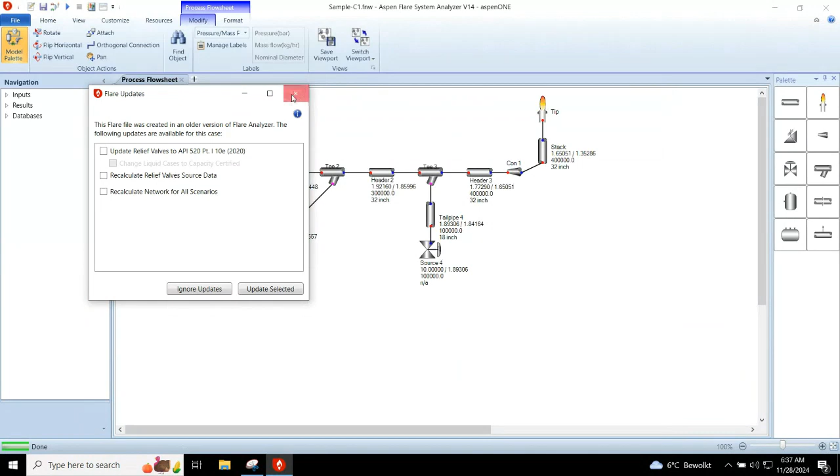So typically a flare header starts with the source, and in Flare System Analyzer there are two categories of source. One is the PSV, right? One symbol is the control valve. So it can be really a control valve, it can be a blowdown valve, right? So these are the two types of source in the Flare System Analyzer.

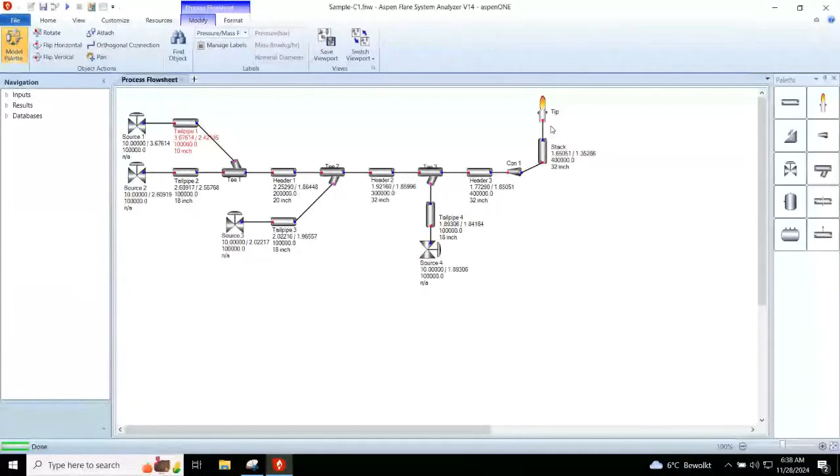So we model the source, which is basically the conditions of relief, how much is the flow rate. Then we model all the pipe downstream of the source, all the way till the releasing point, right? The releasing point typically is the flare tip, where it could be flare, it could be vent, right? It doesn't matter because we're calculating the hydraulics, right?

So why don't we use maybe other tools like HYSYS pipe segment, etc.? I think one is the criteria. First, I would say it's a network, right? There's a lot of pipe joining together to the headers, and you can actually have multiple tips, right? So it can be a complex network, right?

So the one I show you is a simple network, which is what we call a convergent network, because it's converging into a single flare tip, right? If you have two flare tips, then you can say it's kind of divergent, right? There are also headers which have interconnecting piping, which create loops, etc., right?

And basically when we do it, it's not like typical piping, right, where we do the calculation forward, right?

We calculate. Okay, so the sample example is in the installation. So I don't really use any customized file, right, Hassan? Then sorry, I was, yeah.

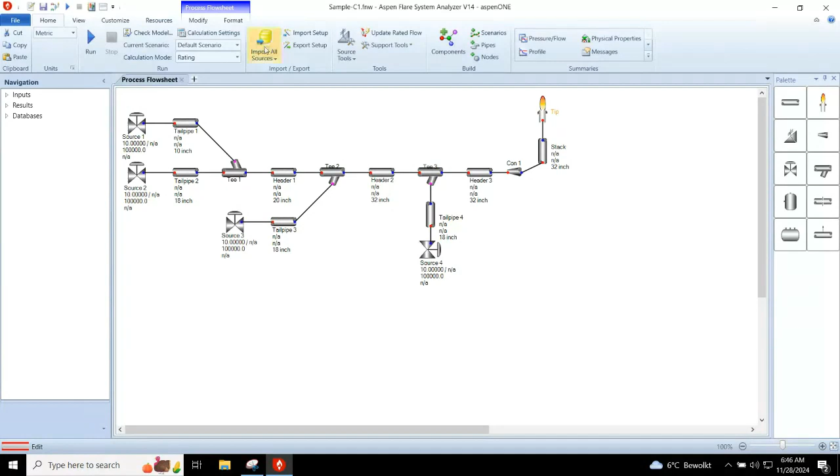The third mode is called debottlenecking. You have a flare network and you might install a new system, a new skid, etc. So you have maybe two or three relief devices forming a subheader and joining the main header. Of course, you only want to size the new system which is added, for example, maybe this part.

So we can identify that using debottlenecking, and we can say this pipe is to be sized, but the rest cannot be changed. So it's a mix between rating and design. So that's the brief on all three calculation modes. So let me go into design.

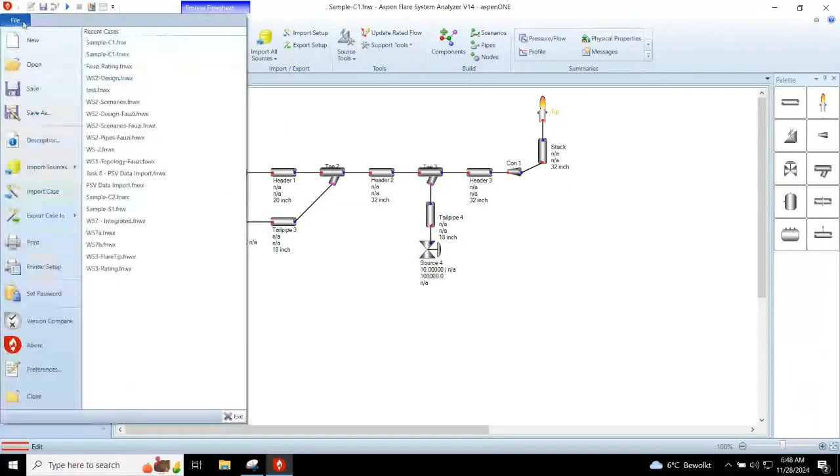I will just quickly close this and start with an empty file. This is just a label, you can just click OK. You see the first thing it will ask is what is the composition. Let's say I'm just going to put this and click OK, and it gives you an empty sheet.

The first thing we typically do is put the sources. The sources could be a PSV or a blowdown valve. Then we start putting the pipes, how they join, starting from the tailpipe. There is a term, especially for PSVs: tailpipe. The tailpipe is the pipe immediately after the relief device, before joining a subheader or a header.

So why do we differentiate between tailpipe and non-tailpipe? Because a tailpipe is dedicated to only one relief device. The term is typically used for PSVs. No other relief device is meant to join there. When you read the standard or a company design guideline, the tailpipe is allowed less conservative criteria. For example, people may allow 0.7 or 0.8 Mach number for a tailpipe.

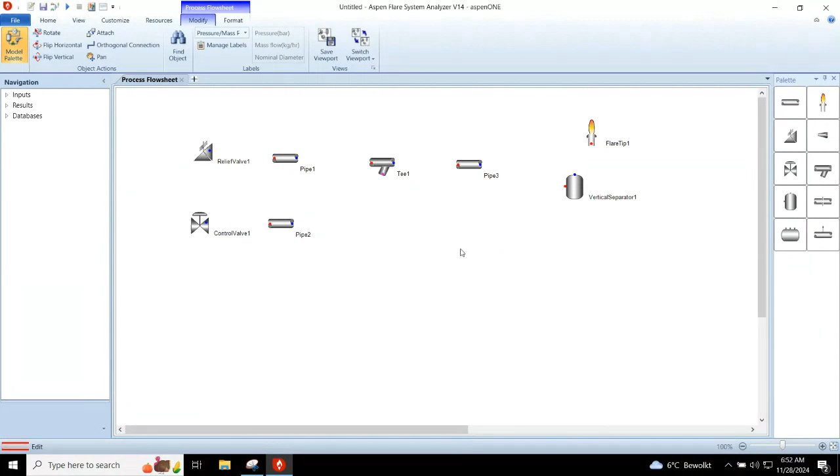Yeah, Omar, I plan to cover that at the end. Sorry, yeah. I'm feeling really under the weather, but yeah, you guys give me energy, right?

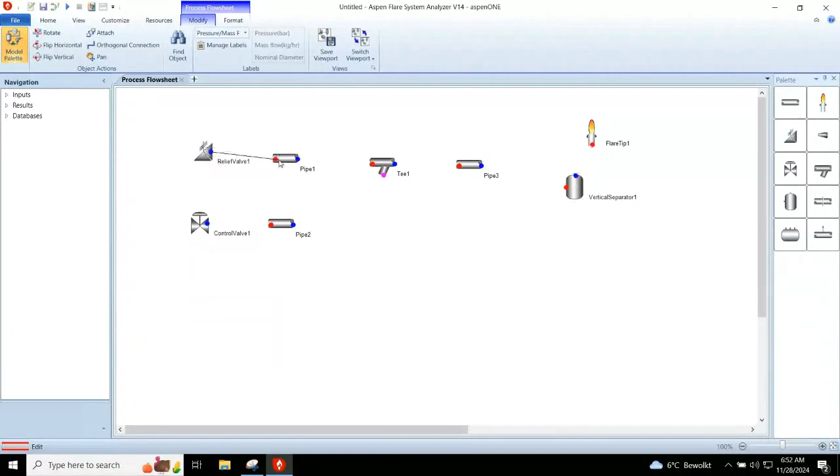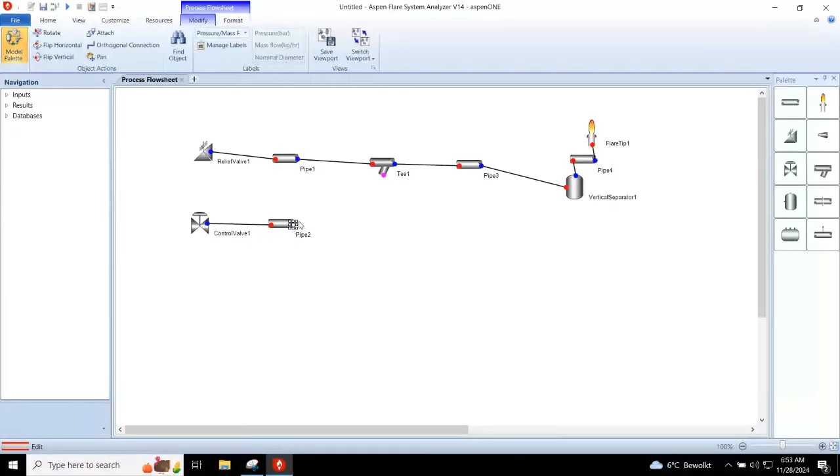All right. So typically, how I build, I hold down the control, then I just connect this, right? Right. Let me build this. All right. So this network, this is just a diagram, right? So what's missing, especially for the pipe, right? The pipe, of course, like I said, here you have to tell which one is a tailpipe. So this one, yes, right.

Oh yeah, the other thing, tailpipe has different criteria, right? I think different limit of the criteria. The other thing also in API, typically they ask tailpipe needs to be sized for rated flow rate, right? It's not design flow rate. So PSV calculated load, let's say 1,000, but you have to size the tailpipe based on the rated flow rate. Like let's say for a selected orifice, the rated flow rate could be, let's say 1,200, right? So that's why it's important to identify which one is a tailpipe, which one is not.

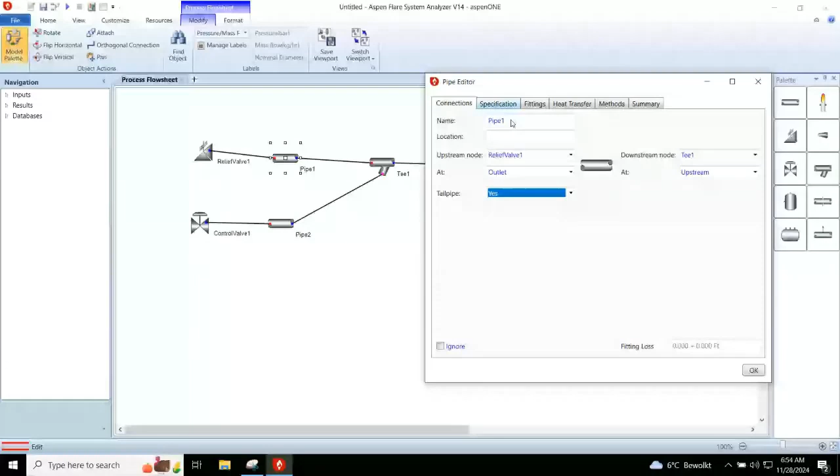Right. So you can see the connection. This pipe is tailpipe, right? Then under the specification, right? So you can see here the most important specification, of course, like the length and the elevation change, right? So I'm starting with a design case, right? So it is also where you are in the engineering phase, right? Sometimes in the beginning, as greenfield project or whatever, right?

You don't have the detailed configurations of isometric where you can get exactly how many bends, how many lengths, etc. What are the valves involved, right? So probably you don't have the complete P&ID, etc. Layout has not been built, pipe has not been routed, but you need to do this preliminary sizing, right? So typically in that case, you might still put a straight length, right? So maybe you draw based on the layout, you say, oh, this equipment is where my main header is, and maybe this pipe is, let's say 50 meter, right? Remember, this is a straight length, right?

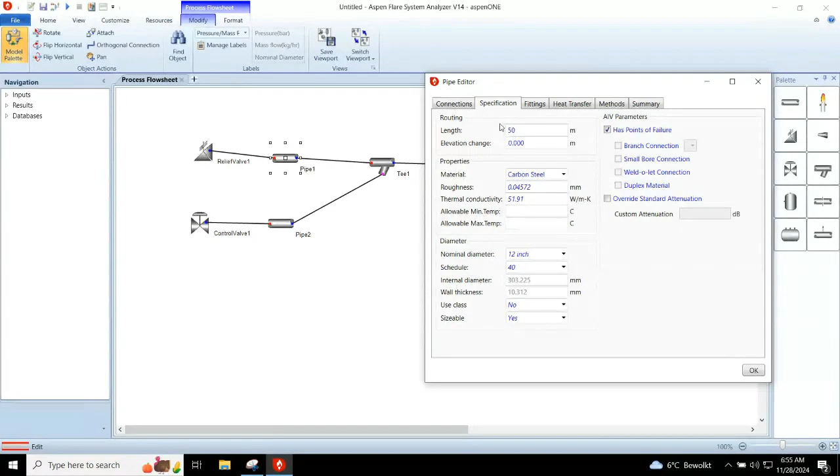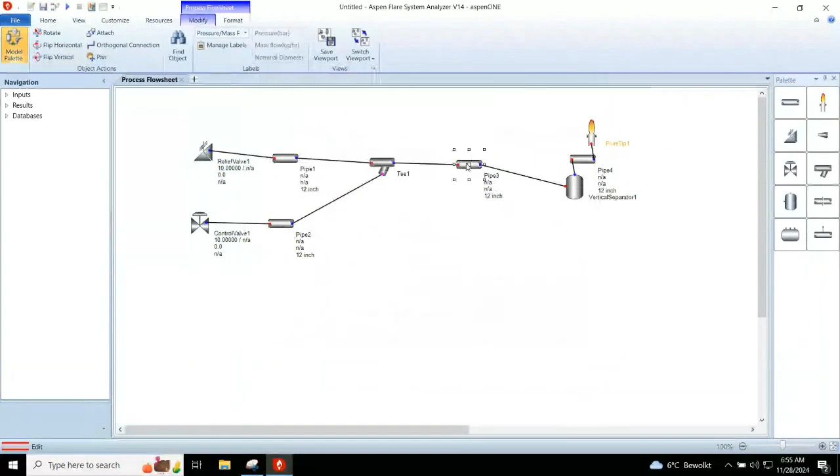OK, so the important part is the length, right? So for pipe, let me fill that. So I'm just going to put some length also here. Let's say this is 30 meter, right? Then this is, let's say, well, my computer is a bit slow. Let's say this is another 50 meter, right? Then this is, let's say, 100 meter. All right. Okay, so the pipe is defined, right?

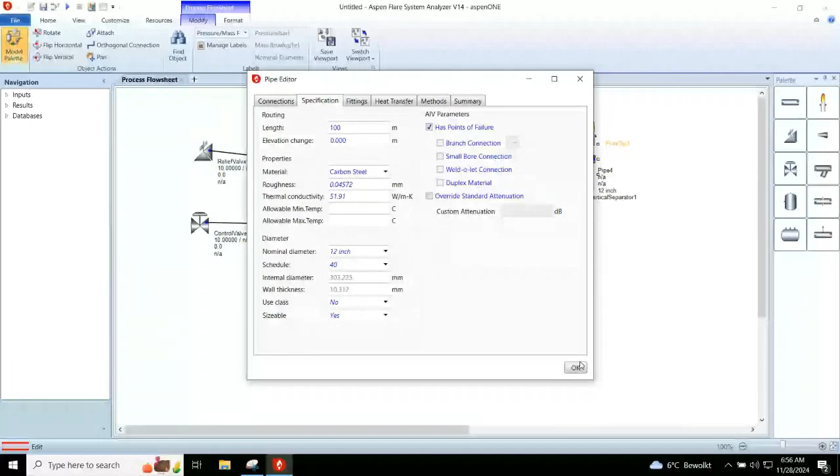So now we have to define other components, right? Before I define other components, I'll go to the source, right? So let's say this is the source, whatever here should come from either your blowdown calculations or PSV sizing, right? So it will ask you what is the relieving. Okay, what is the set pressure? Let's say this is set pressure, putting some numbers here, 15 bar, right? Relieving pressure. So this, you see, is the contingency.

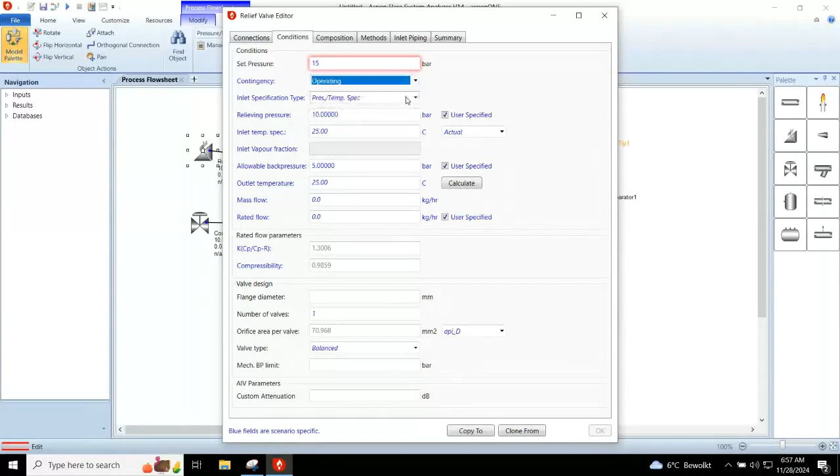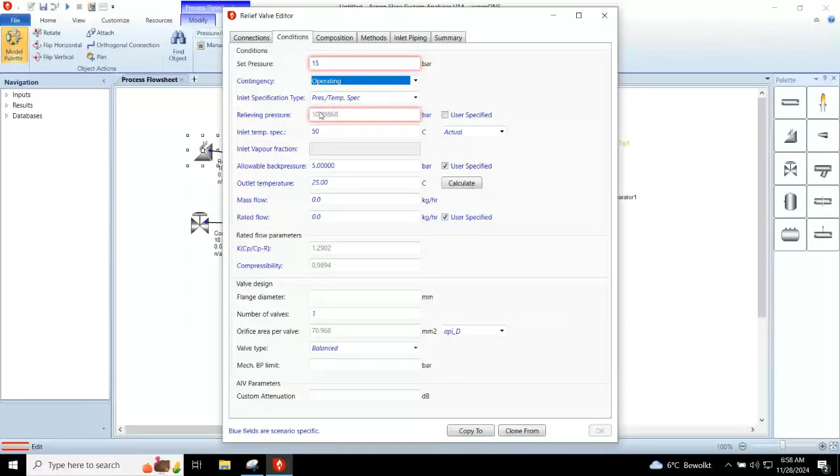So we have two, either operating or fire. That is the PSV size, right? So whether it's user specified or it's to be calculated, right? Relieving pressure. Okay, inlet temperature, let's say 50. Let me put this number first. I think there's something wrong, right? I will then override. There's something not right if I put, okay, 10, operating, which is 10% overpressure. This makes sense. Let me change it to 15. This should change. Funny, it doesn't change. Sometimes it does happen. Okay, let me just put it 10 first.

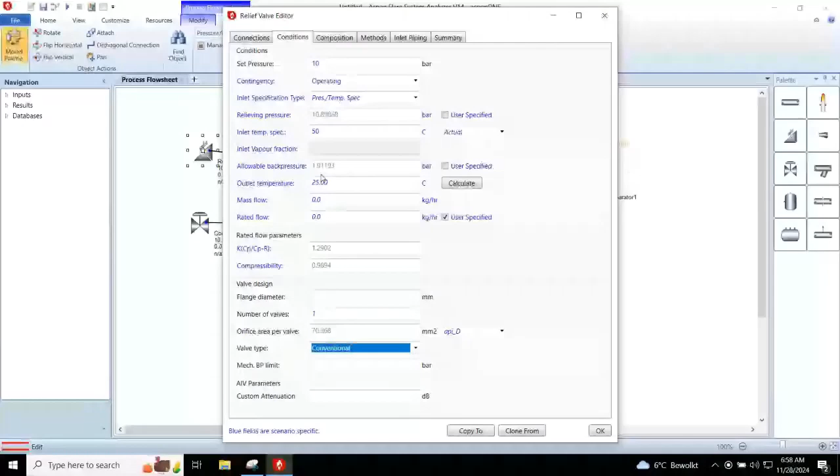Okay, inlet temperature, then allowable back pressure, right? Allowable back pressure will be based on the type of the valve, right? Let's say this is a pilot, right? So you can untick this, then it will, sorry, not pilot. I want to choose conventional actually. So this is about 10%, right? So it calculates. Outlet temperature, let's just put 25. Mass flow, let's put something, maybe 10,000, right?

So that's why this has a rated flow, right? The rated flow, typically we prorate it from the size of the orifice, the calculated orifice and the actual orifice, right? So let's say for this case, I need to put the composition first.

Give me 1 second. And again, during the initial design, probably you don't have a lot of details, or you don't want to put a lot of details. Maybe you just go by molecular weight. We can do composition, but depending. So let's just assume that in this case you have the molecular weight, 24. It will just distribute to the relevant components to get 24 molecular weight. But you can change it. If you have more information, you can put exactly the mole fraction or the mass fraction. Let me go back here.

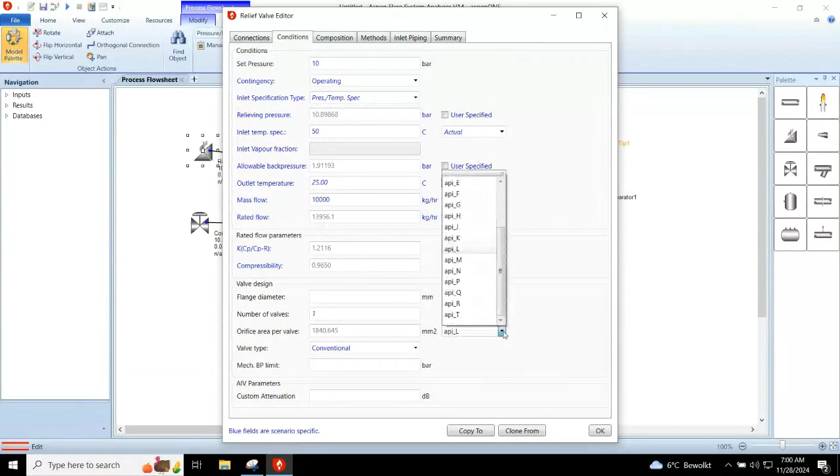So then I want the rated flow to be calculated, so I can untick this. You can see this rated flow is only 500. Our target is 10,000. That means this D orifice is not sufficient. So let's put L. It's getting there. It's actually already more than 13. Let me test it one more time. What about K? It cannot, right? It's below the required flow rate. So I think L seems to be right.

Okay. So I think this is done for this input. So let me click OK, and before I create anything, let me save this file. Where's my mouse? I can't see my mouse. Okay, here you go. Okay.

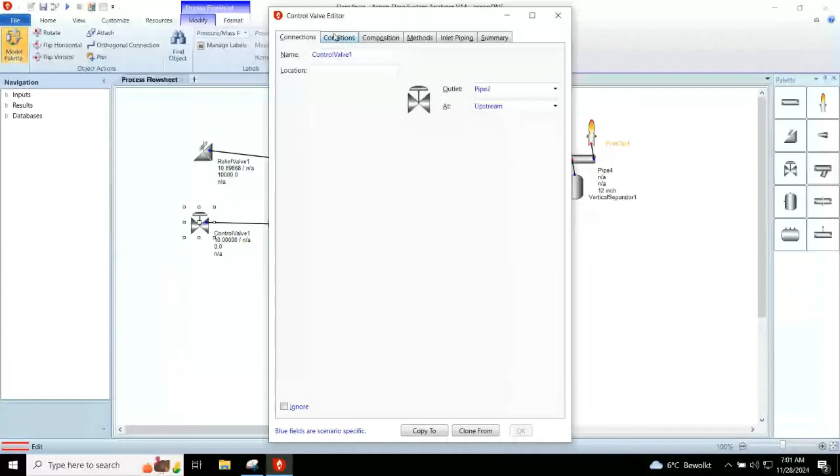So I've done the first relief valve, and this is the second source. It could be a control valve, it could be a blowdown valve. It is a simpler input typically. So let me just put here. 10 bar is okay. Let's say 25 is okay. I'm just going to put some. This is maybe 5,000. Composition, let's say 18. Okay.

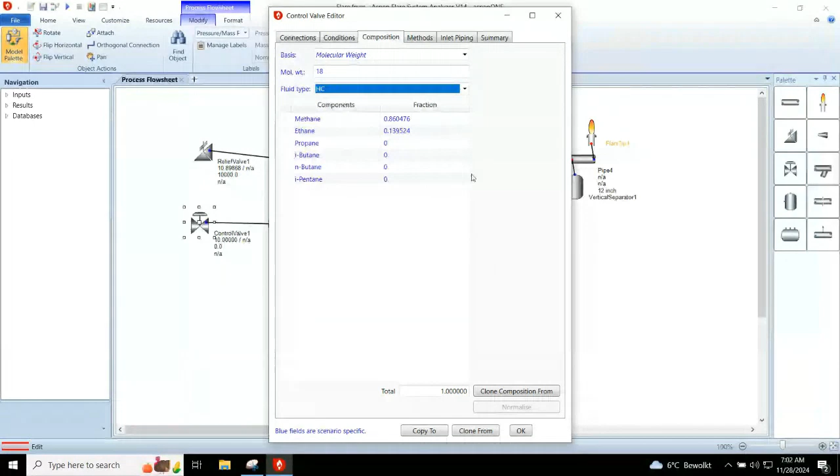And now I think the other thing is this. It has a default diameter. Let's just take that. So for this one I have put that, and I think the flare tip also typically has the input of the opening diameter. So let's put, I don't know, maybe 500. Yeah, fine. I'll just put 500 first. Okay. All right.

So you can see here we can change the calculation mode. The calculation mode can be rating. In this case, I want it to be design, because I have not changed the pipe input. You can see all the sizes are still the default size, 12 inch. And I want to size this, to determine whether this is the right size or not.

Then before that, we talked about the length. I've inputted the length, but in reality, there's no straight pipe. There are always fittings. We have not taken into account the valves, elbows, etc. So there's a concept of equivalent length. If we don't know, we still have to consider some additional length to cater for the elbows and the valves, etc. We don't want to be caught later when we add the details and the size is not sufficient.

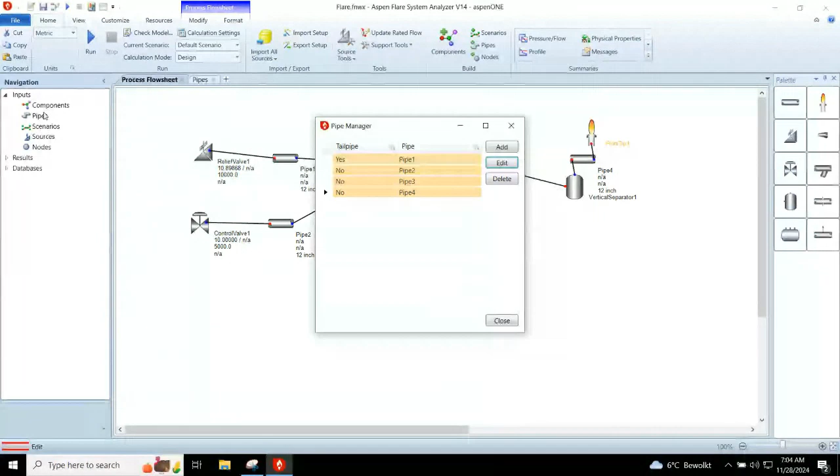So how do we do that? We can go to the pipe, and I will add this to all the pipes. I can select and click edit. In this case, we can go to the fittings. There is a length multiplier. This is something we can use to give some additional length by multiplying the straight length you have calculated. So let's say we put 20% more, 1.2. If I put it here, it will get applied to all the pipes. All right, I will check. You can see the length multiplier 1.2 is applied everywhere.

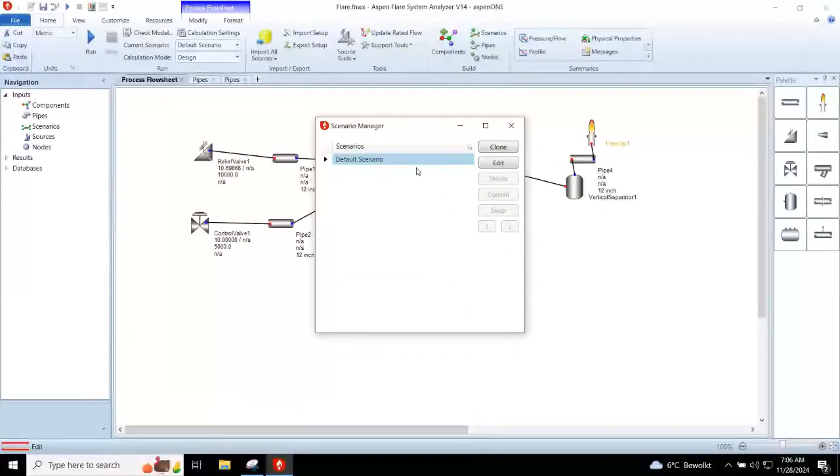So the next thing is, you can see here the default scenario. We need to define conditions or scenarios. Typically, a flare network is used for multiple release scenarios. It could be a fire case, or a failure of cooling water. You want to check what happens if this occurs. You might assume that in this fire zone, all the PSVs are relieving, so you will need to make sure all these sources are active. You define that under the scenario. You can have multiple scenarios; you can clone and edit. A scenario has two parts. One, it determines which source is active. So let's click edit.

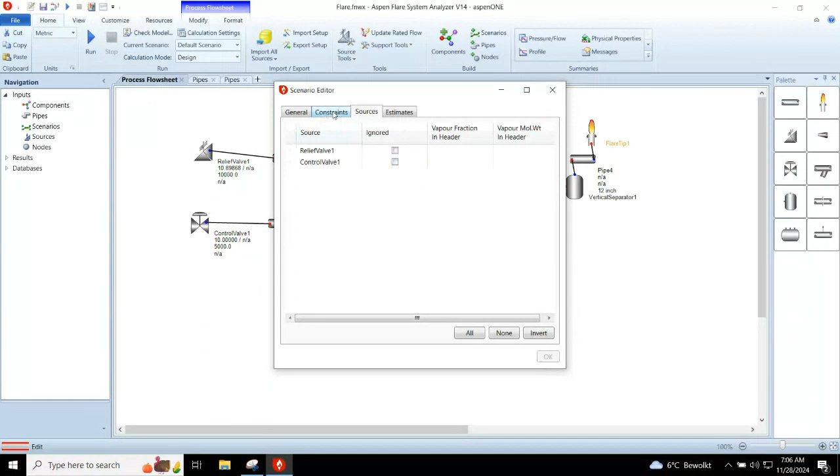So you can see here which source is active, right? If you tick, it's actually ignore. So that means in this scenario, because I don't tick, both sources are active, meaning they will release at the same time. And the other thing about scenario, you can apply a different criteria. So for example, here you can see the header, like I said, I put 0.5. I'm putting only one criteria now, I don't put other criteria. Tailpipe 0.7.

So I click OK. Then I think I have enough. So I will run the design case. So what it will do, it will iterate the changing the size. So it will give you warning because design will change the size.

Is it? Okay, there's something. Let me check what the result is. Oh, maybe the flow rate is too small. Everything becomes 2 inch. Okay, let me do. Is it true? Hold on. I think there's something. No, I don't think so. Let me check what's wrong.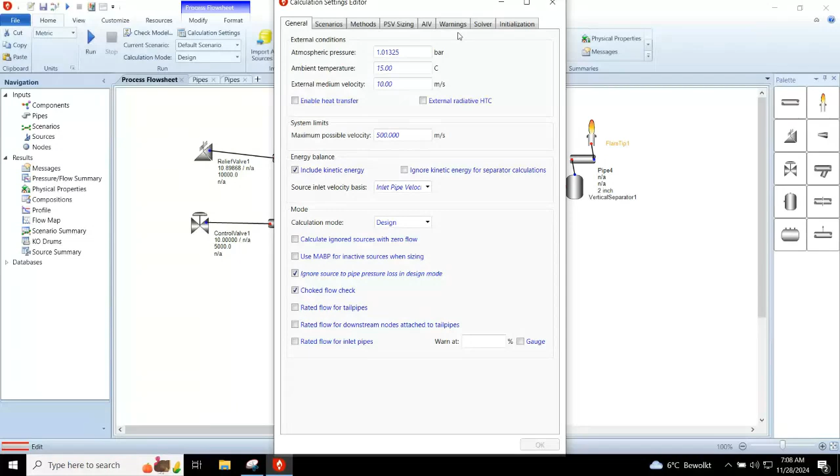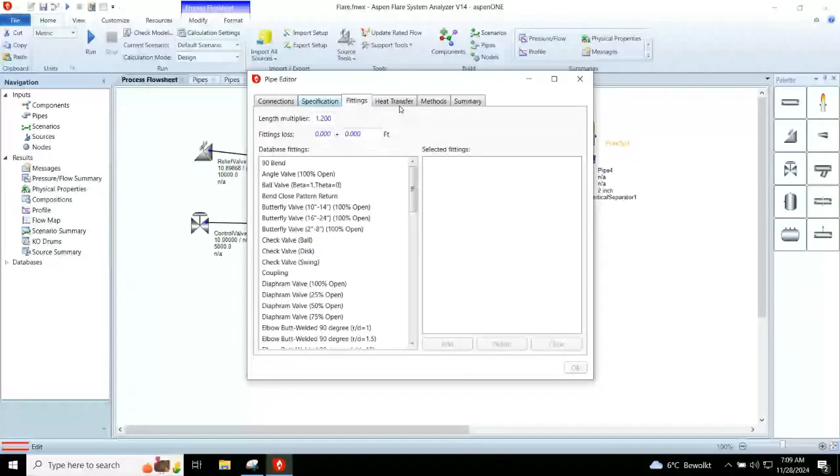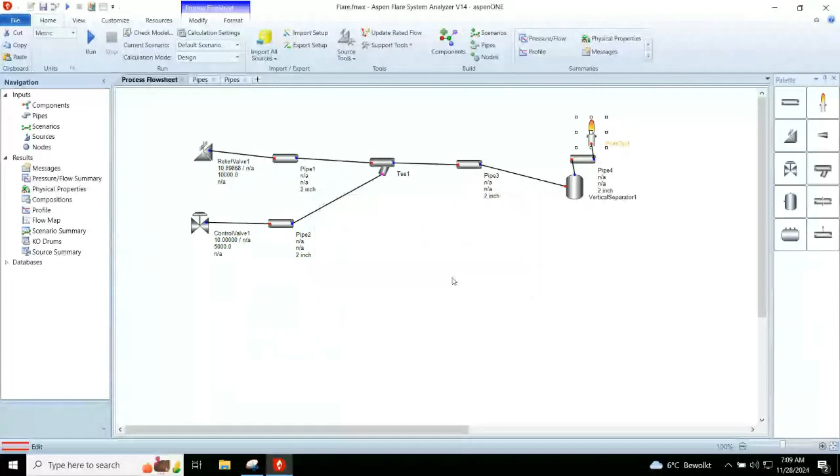Calculation setting. This is default scenario. Okay, calculate. I need to make sure it's calculating the scenario. Oh, still not calculating. Let me check, this is unusual. Nominal diameter. Or let me put this size first. It's not running. Give me 1 second.

Trace or error message. Calculation 36 error. Okay, let me check what the error is. Flash failure. I think it actually could be. Sorry, I didn't test the value, so I need to do some trial.

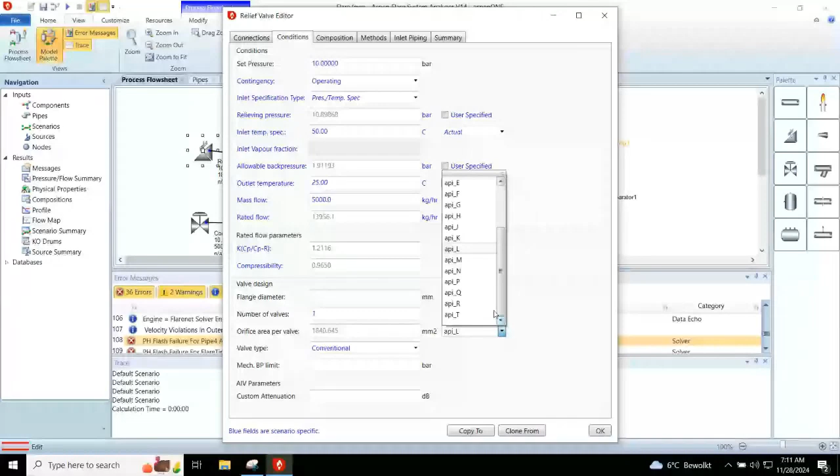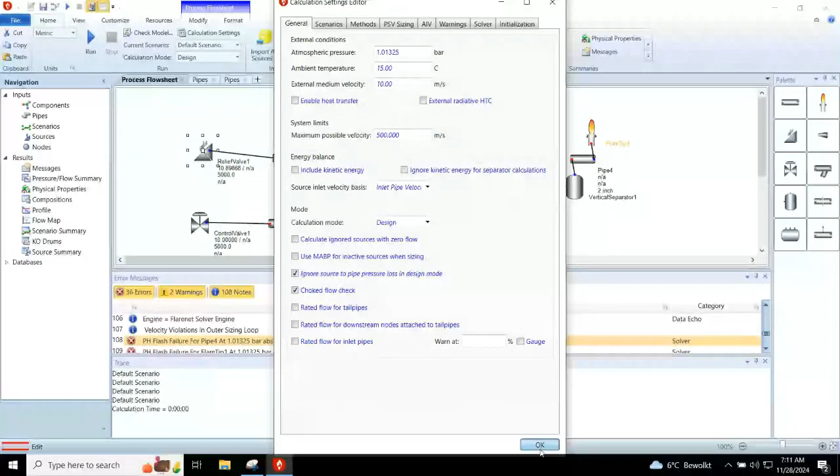Okay, sorry, Gerald. Yeah, let me do it. Oh yeah, thanks, Gerald. All right, okay, thank you so much.

All right, so you can see it's actually sizing. Of course, in this case, maybe we didn't limit the size. You can see here there's a 5-inch size, 3.5-inch size, 8-inch size. But the point is, it's actually iterating and changes the size of the pipe from the original 2-inch to meet the criteria.

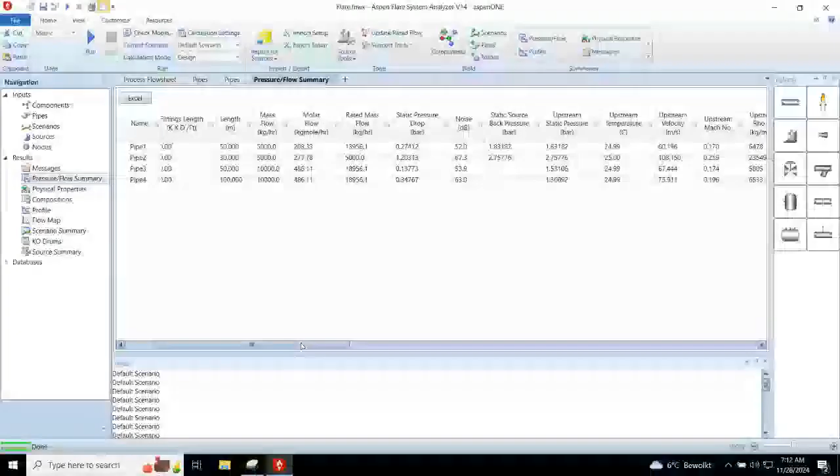Then we can take a look at the report here. For example, what is the noise? But again, this is still a crude calculation, because we haven't put a lot of details. We just put, let's say, a multiplier. We haven't considered heat transfer if you want to check temperatures of the pipes, etc. But this is enough to get you the preliminary sizing. So this is the design mode.

Okay, let me switch. So then typically we can also switch to rating mode. Once we have this preliminary, we can add more details. Or if this is an existing flare header, you can also start with rating. So let me switch to rating. First, I want to show you how rating operates.

So let's say this has been sized for this flow. I can either change the flow or I can change the pipe. Let's say the condition changes. This is your existing pipe, but maybe your equipment changes, you run a new relief load study and you're calculating the required relief. So I'm going to update the required relief and check whether my existing pipe size still holds. So let's say this becomes 7,500.

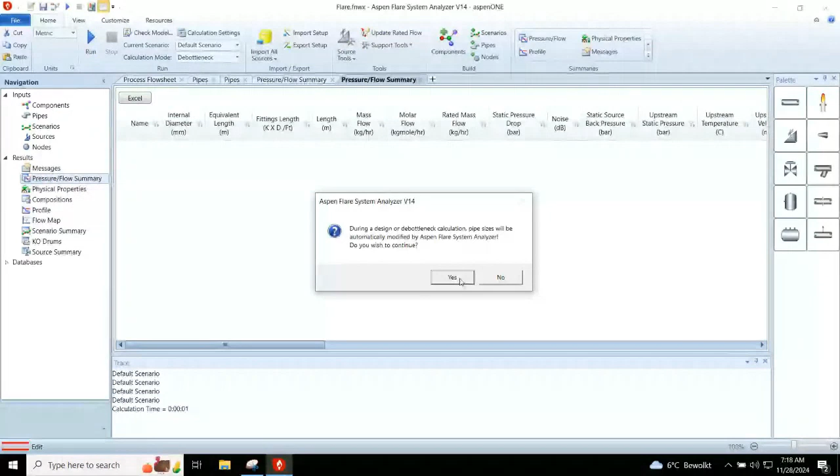Right. So let me check. Okay. So it seems like 6 inch is actually fine. You can see 6 inch is fine, right? Let me demonstrate by changing the pipe. So maybe I'll change to 4 inch. Oh, sorry.

So you can see, it was 6 inch and it changed to 8 inch. You see, this has become 8 inch. It was 6 inch when we first ran, right? So the debottleneck will look at which pipe is sizable, which I said is only this tailpipe. Then it changed this to 8 inch. So this is the calculation mode for debottleneck.

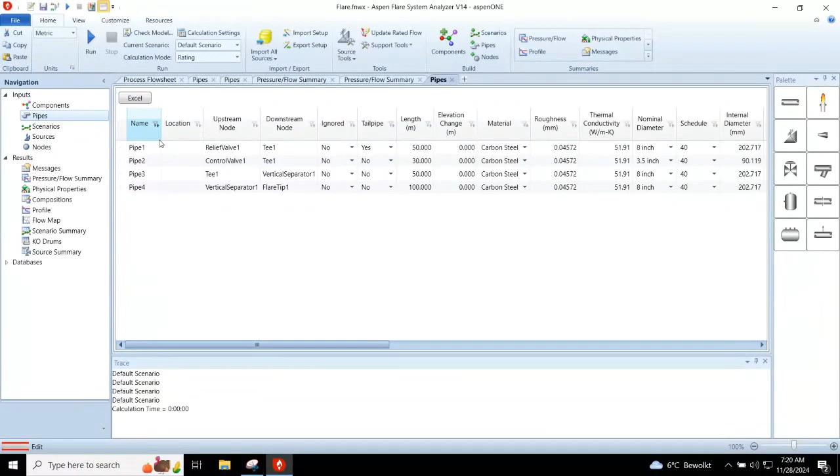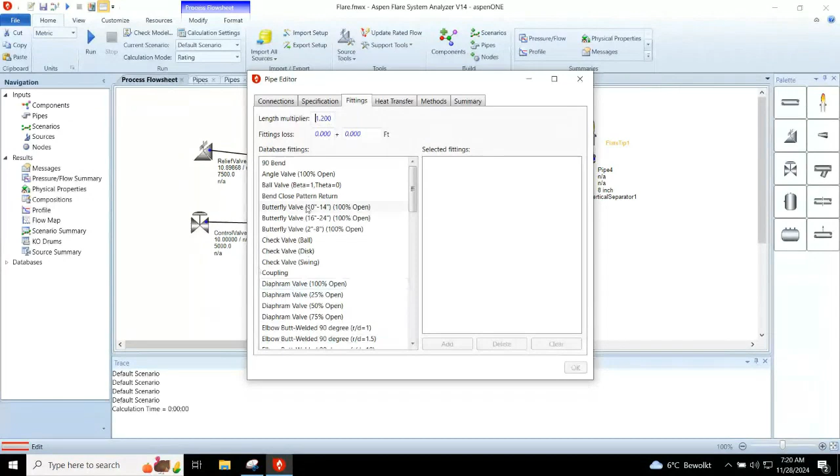Then I want to go back to rating mode. Rating mode, like I said, can be used after you get your preliminary size from the design mode. Then you switch to rating mode, and this is where you start putting details. Maybe the details are that you change the equivalent length. Last time we put equivalent length 1.2, and if you already know the configuration, you can change this to 1 and put exactly what the fittings are.

Then you may be enabling the heat transfer calculation, right? Because during the design, you don't want a lot of heavy calculation, because it's doing iteration calculations on the pipe. So once it got the first guess of the size, we can switch to rating, add more details, add more calculations, then verify whether the size still stands, right?

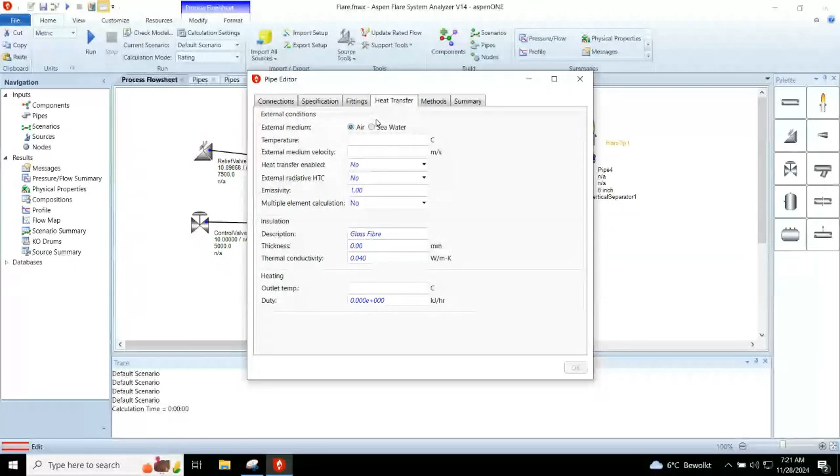For example, the heat transfer, updating the fittings, and you might update the flare tip, depending on what information you have. You might add the curve from the flare tip. The curve is typically obtained from the tip vendors. That is how much pressure drop for different flow rates, so it gives you, okay, for zero, maybe for 500 or 5,000, how much pressure drop, right?

And that's typically a curve, right? So that is used to calculate the back pressure, because varying flow rate will have a different pressure drop at the tip, right?

So let me go to the, if there's any questions, let me go to the... okay. Let me read some questions here, right?

So Gerald asks, can you explain a bit how the algorithm works? Pressure is backward calculation and the mass flow rate balance is forward, starting from the source. Correct, right? And for the tailpipe, when we declare the tailpipe, it will use the rated flow, right? How about the energy balance?

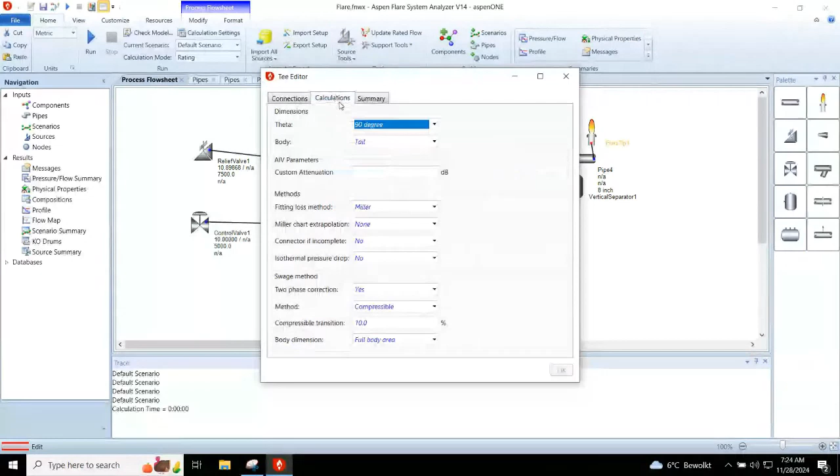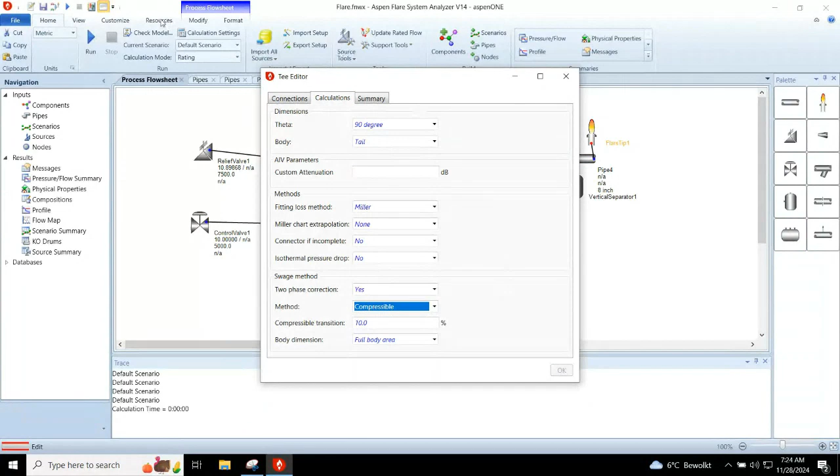Yofi: if we click the tee, fitting editor's calculation will find fitting loss method. Which method is the best and common for industry? So let me see. You mean this one, right? I think let me go and press F1. Yeah, sometimes I also read what the method is, then I just press F1.

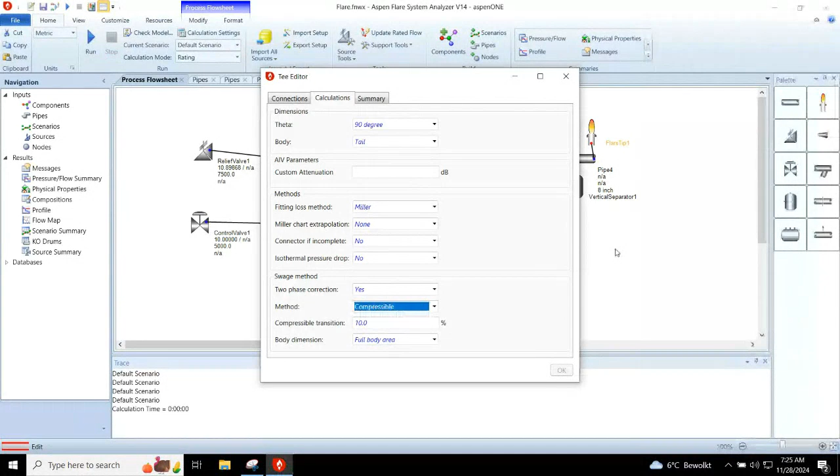Sorry, my F1 is, I can go here. Reading the function F1. Oops, it's locking to projection. Okay, let me get back to you also. Sorry, Yofi.

I have a question. I've modeled PSV with rated flow rate where I experienced the tailpipe outlet having Mach number 1, right? So Mach number 1 means that it is very much choked, right? The tailpipe inlet is not very high, around 0.3, right? I think the tailpipe inlet is not very high, and the length specified is very short.

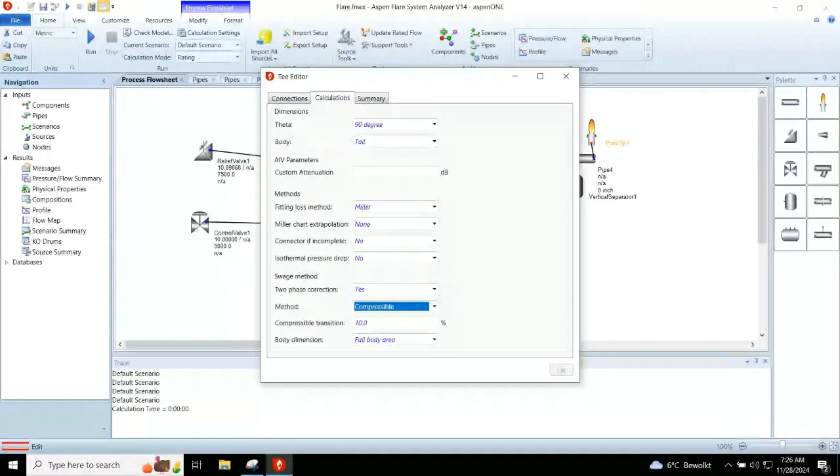Okay, I think that's interesting. You're saying that the inlet is only like 0.3, then it suddenly goes to Mach 1, right? I can't be sure, but it does seem odd. It could maybe be a program error, but I cannot be sure, and maybe we need to see the file, right?

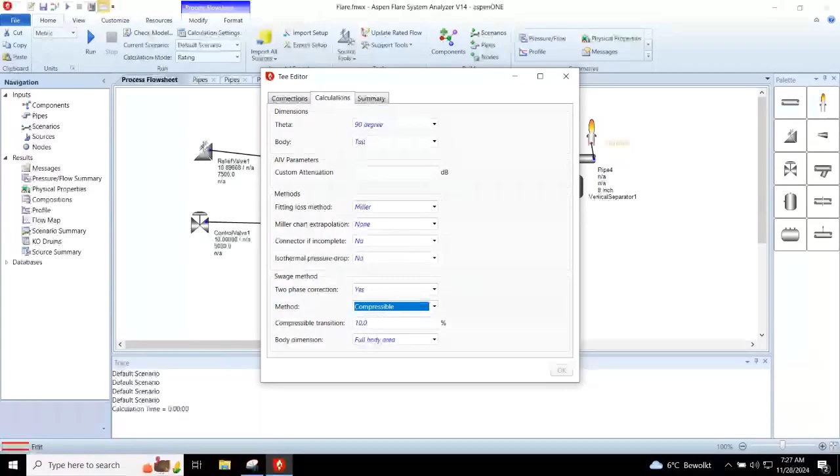I also experienced negative back pressure at the tailpipe during this time. All right. It shouldn't happen, right? Let me see what could cause negative. The only thing which I've seen when you have a negative is like a negative flow in the network. That could be because of a loop, then you have a reverse flow. I've not seen negative back pressure, right? Okay, I owe that one.

How does Flare System Analyzer integrate with other AspenTech tools? So Aspen Flare System Analyzer integrates with HYSYS and Aspen Plus, because HYSYS and Aspen Plus have PSV sizing calculations. So let me find an example, then we transfer the data. That's the only integration Aspen Flare System Analyzer has.

Yeah, Gerald, thank you for the tips just now. Ali, it was what Gerald said. I turned off the kinetic, right? And I think I need to also research about those kinetic calculations.

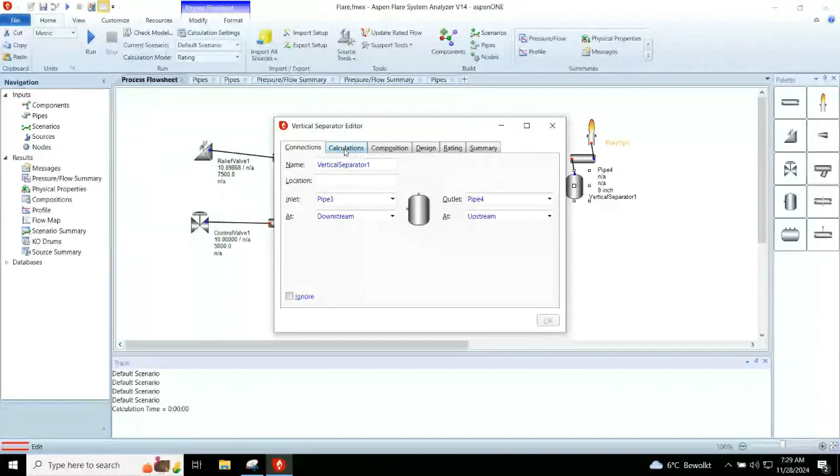Okay, more: the drum and the flare tip setting. For the flare drum, essentially it's just the diameter of the drum, right? For the flare tip, it's the size of the orifice of the tip. So these are the dimensions, typically quite small. You can also improve the calculation here by inputting a curve. You can enable this curve and input the curve you get from, let's say, the vendor.

Let me mute. Okay. Okay, I hope that answers.

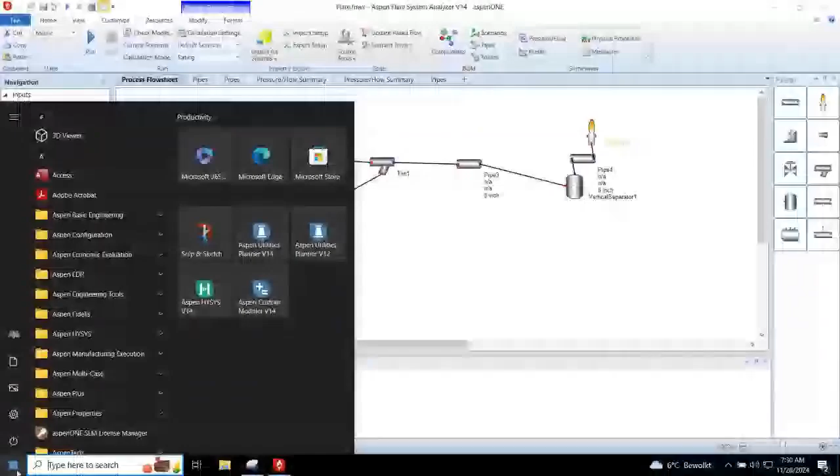Okay, right. So let me do one thing. Let me open HYSYS. I will demonstrate importing HYSYS data into the Flare System Analyzer. Right? One sec.

Yeah, I think I might be running a few more programs unnecessarily. It's a little bit slow, or slower. Could be. Okay. My size. Hard disk. Okay. This is a virtual machine, so yeah.

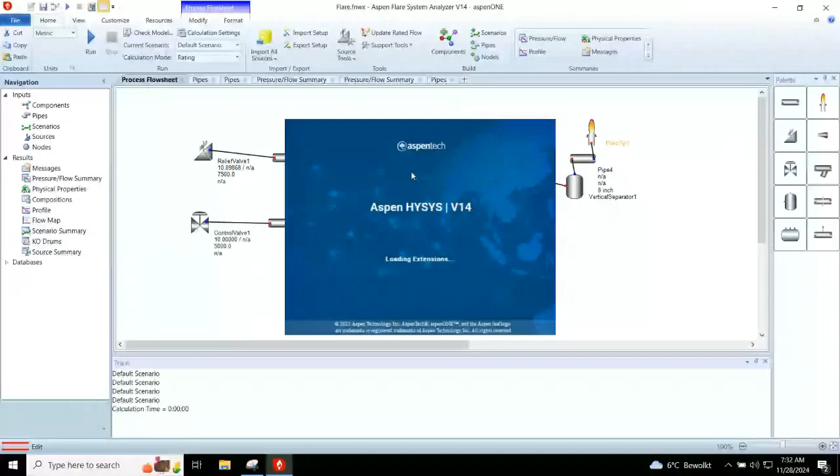All right. Okay, maybe I'll do one thing. I will send a recording which shows you how to import data from HYSYS to Flare System Analyzer. Is it opening? This is already open. If I can just do it quick.

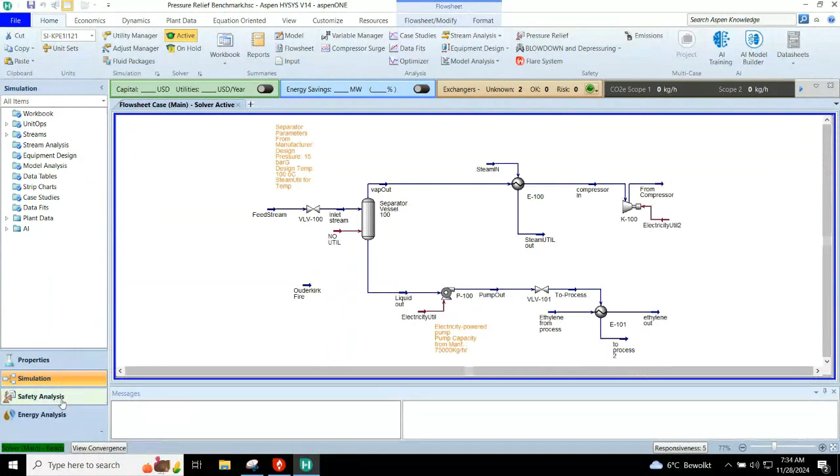So let's say relief, right? We have relief, pressure relief. Maybe this way. Okay. Okay, let's see how many PSVs, what PSVs we have here. Safety analysis. Okay, we have this PSV. Okay, we have a few PSVs, right? So let me check.

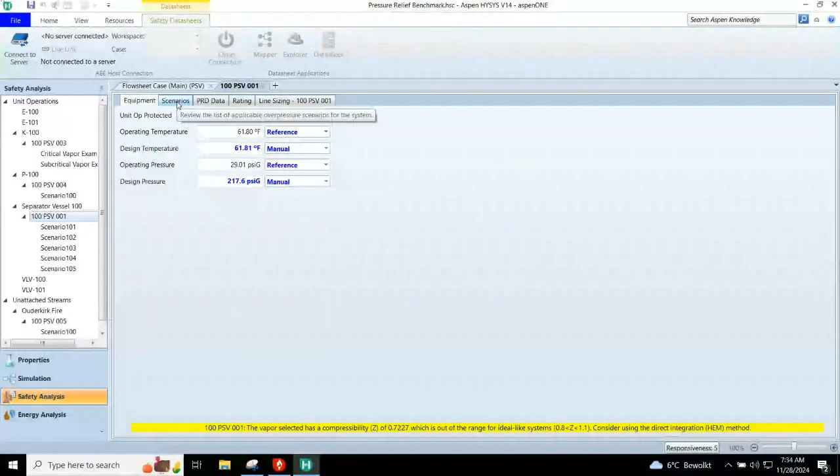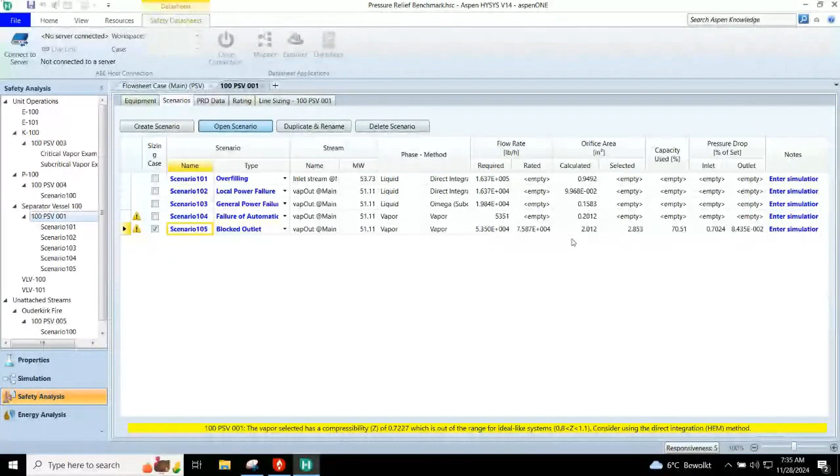Let me check this 100 PSV 001. I want to see the scenario. Let's say this is blocked outlet, right? I can click this and open the scenario. I can see here also. This is the flow rate, 5.35 something, right? I think I need to open the scenario, then I will see the condition.

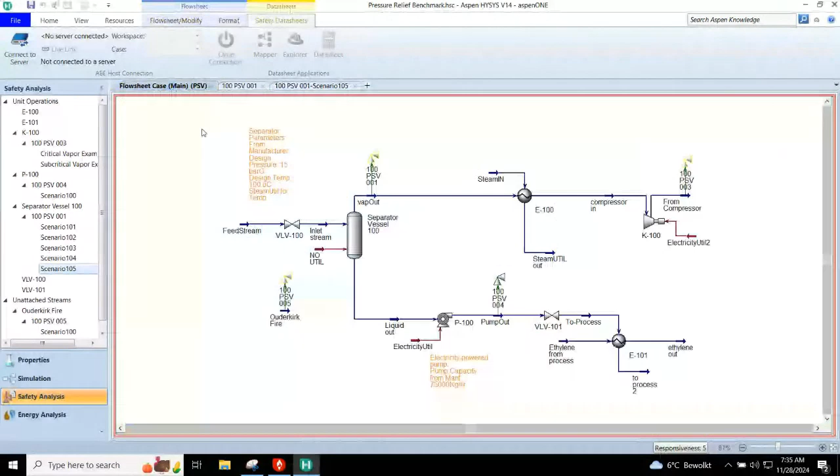These are the conditions: 104 degree F, etc. Flow rate 5.35 E4 pound per hour. Okay, let's try to import this data, 100 PSV 001, right? So this file, let me make sure. So the file is here, pressure relief benchmark, right? Go back here.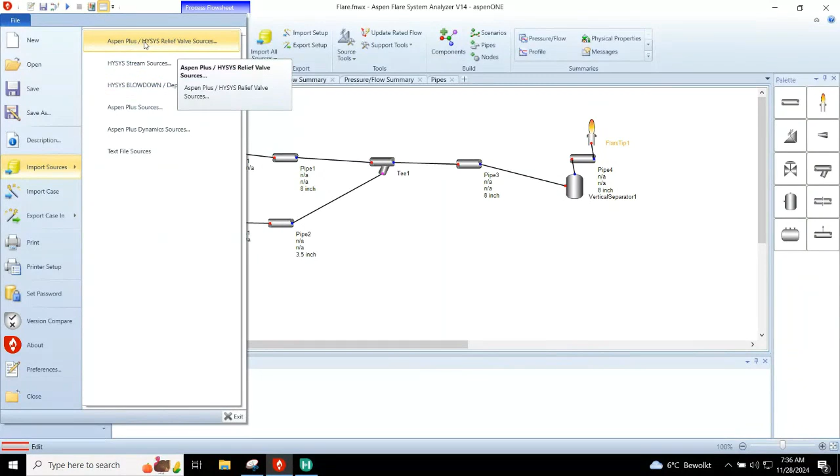You can go here, File, Import Sources, right? So with import sources, we can import stream, blowdown calculation from HYSYS, or PSV, right? So this is a PSV, can be from Aspen Plus or HYSYS. So we need to point to the file. That's the file. Open the file, upload the file, and it will read the file.

Okay, so you can see here, it reads all the PSVs here, right? 100 PSV 001. I'm going to transfer only one. First of all, it will ask which scenario you are going to transfer to, because one relief source can have multiple scenarios. You can have a blocked discharge case, you can have a fire case. So you need to map to the relevant scenario.

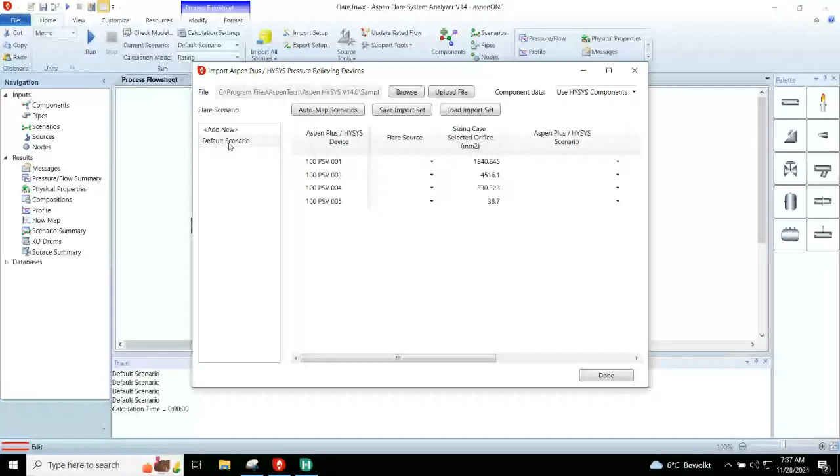If you're saying fire case for zone 1, that means we transfer the PSV data for that PSV on the fire case. So we have to identify which one. Because this is PSV, we only have one, so this is relief one. Then it will ask you, because this PSV has multiple scenarios, we want to transfer the blocked outlet. You can see these are the numbers which are going to be transferred. So we can click OK.

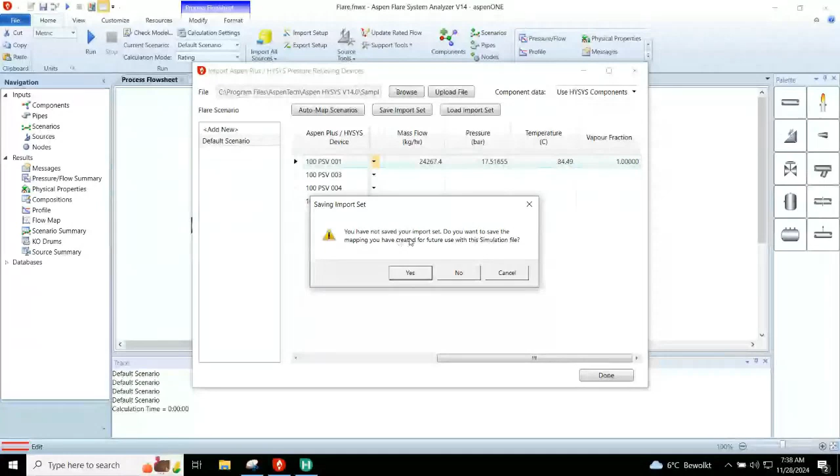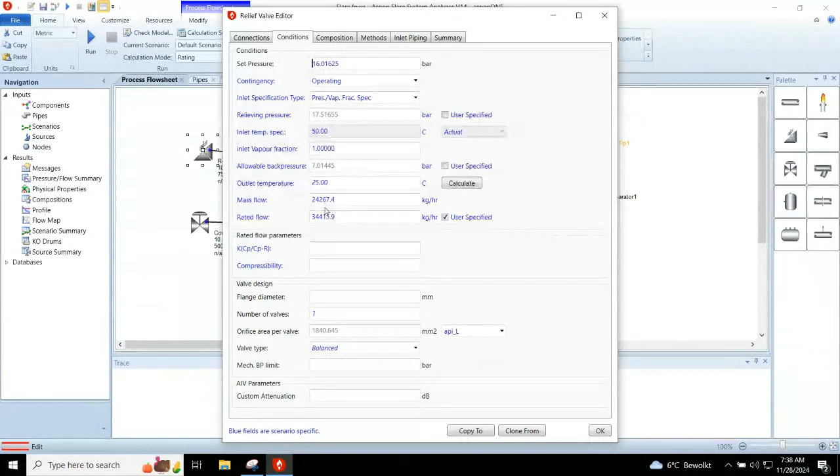You can save. Then we can double click this to check the data imported. So you can see this is updated: 5.3 E4 pound per hour, the flow rate. I think the composition should be also updated. Right, these are the compositions.

Just now we specified, I think, until butane, and you can see once we import, it actually reads the component list from HYSYS and adds it here also. So this is how you transfer. You can transfer from PSV, you can transfer from blowdown. I will create a recording for this also and send it via email or post it.